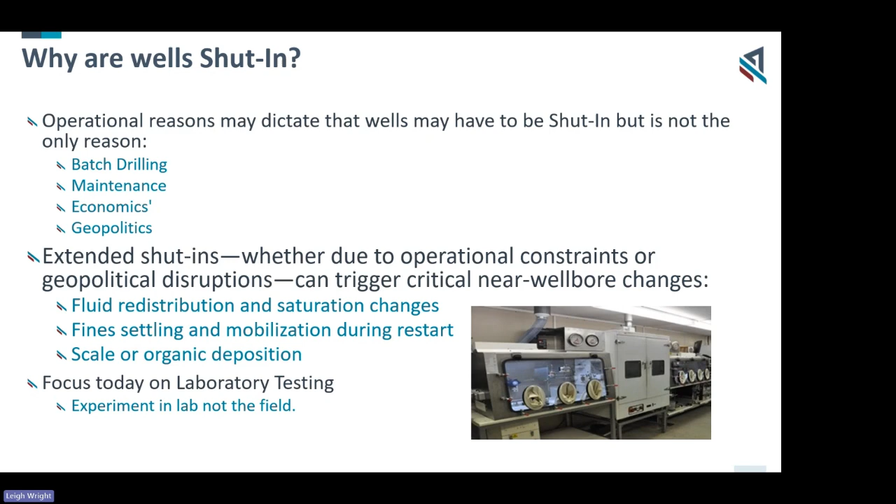So as mentioned at the start of this slide, today's focus is on laboratory testing from a formation damage point of view. I'm not an engineer, so I won't go into too much of the completion side on that. But creating understanding and pre-planning shut-in wells and restart strategies avoids unnecessary intervention costs.

So obviously, planning is key. If you are going to batch drill, for example, then understanding what will happen with the fluids interacting with the near wellbore is important. Understanding that if intervention is going to be needed in early life, you might want to acidize that.

What's important is that you understand what's going to happen when the well comes back on. You don't want to turn the tap back on after waiting 9 months, 12 months, 2 years, and then have to shut everything down and go in with a treatment to stimulate. Poor planning means you may have to spend more money in the future, which is not economic.

If behavior is not understood, then you might have mechanisms that are going undiagnosed, and the treatment could be wrong. For example, if the well comes back on and is not producing correctly as expected, you might think that's related to the mud, so you go in with a treating agent to dissolve the bridging agents or solids of the candidate drilling fluid, where actually it could be scale that's formed. You'd need a different treatment solution, and also that might not be fixable, so the production losses may become permanent. It's really important to make sure these are planned and understood.

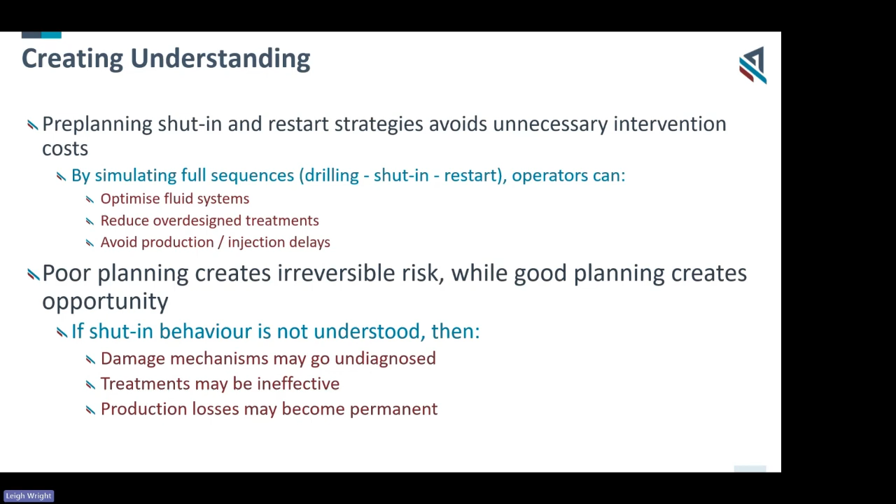When we're talking about geopolitical risks, this is maybe something you can't mitigate against. But whilst things are shut in, you can always carry on and check later on whilst the well's shut in, before you start mimicking what you've done before.

So what is important in terms of testing in the lab? The reservoir core material is available, prepared and selected correctly. What's key here is when you're doing different areas of shut-ins is that you have the correct core. That way you can understand the geology, making sure the right analysis is done at the start of the project or campaign.

XRD, for example, is key to understanding what fines are there, what quantity, are they swelling or mobile? Are they going to settle out?

The pressure and temperature is extremely important, mimicking that correctly in the lab. A few degrees temperature difference could have a massive effect on the chemical reactions. You might have polymers that don't break down at a certain temperature but break down at a higher temperature depending on the fluid type. If you choose a lower temperature than is representative, you might not get the correct chemical reactions in the shut-in test, which gives you a false narrative of what's actually going to happen. So as in all formation damage testing, you want to mimic as closely as possible the reservoir temperatures and pressures, because the chemistry is really important.

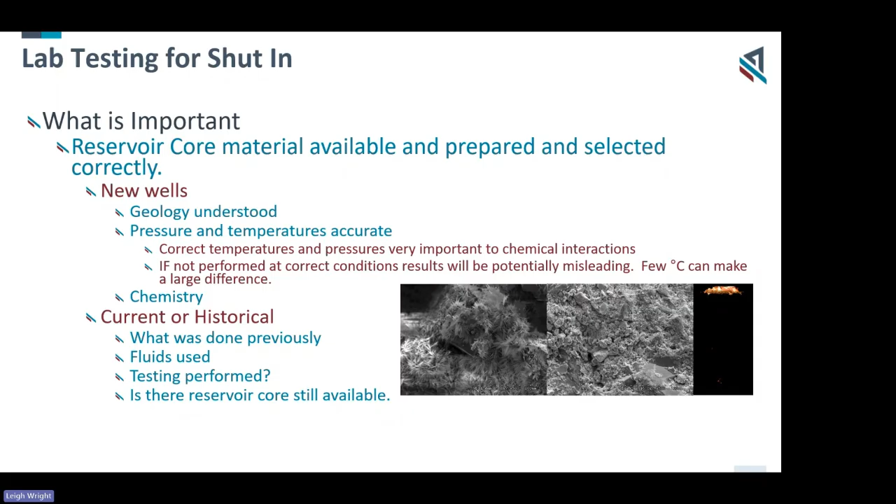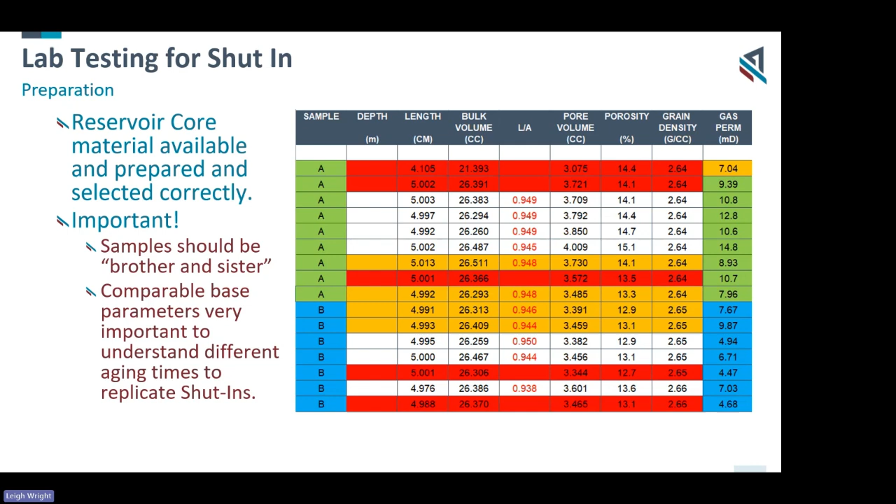So that's just a very proper housekeeping moment - to make sure that the samples are as comparable as possible.

Diagnostics is really important as well. As you may have heard in previous presentations, or if you've worked with us in the past, it's important to understand what has occurred to give the best solutions for any treatment if there are any issues. So what's causing the alteration? Why is things not coming back online the way they should?

Also, if the solids from the drilling fluid have gone deeper into the reservoir, have they settled? Have they been able to be back produced? And as we were mentioning earlier, what's happening with the compatibility of the fluids, has there been scale forming? So cryogenic SEM allows you to see everything that would be removed in solvent cleaning. For example, if there are any salt precipitates formed due to interactions or fluid incompatibility, with potential separation of the drilling fluids over time, if it's high temperature, long-term shut-in, the cryogenic SEM will have the power to allow you to understand the impact of that along with all these.

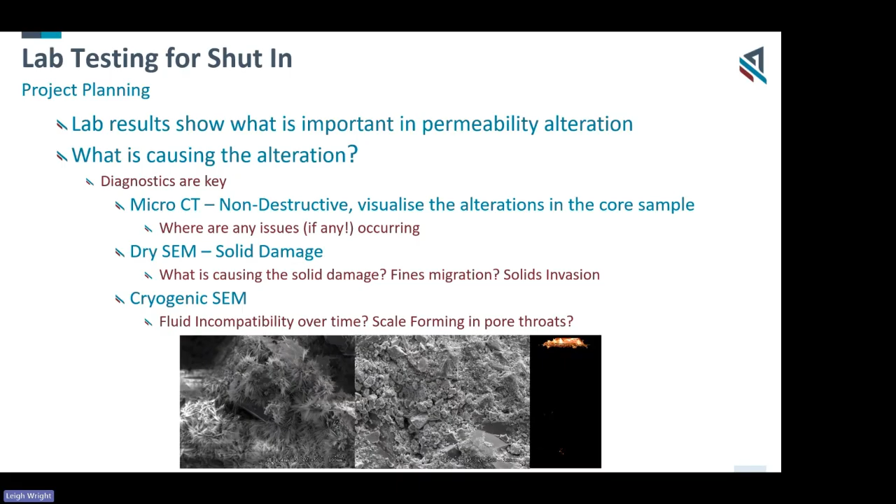As mentioned, onto the first case study from the North Sea. We're looking at a siliciclastic reservoir, new wells. As mentioned before, we have reservoir preserved samples, allowing multiple cores to be taken from each, and there are 2 lithologies, so 2 preserved samples.

So when we're doing that, we manage to take many samples from each of the preserved samples, and when we're running the base parameters, we manage to integrate with the client to make sure that the samples were brothers and sisters.

The case study will show that the drilling fluid was analysed first. So in the lab, they did a drilling mud application followed by a drawdown to see how the mud interacted with the core to give a base case.

That sequence then was built up to include a displacement fluid. So again, that's showing the mechanisms that are reducing permeability with this drilling fluid on its own, and then the drilling mud displacement. So once you've identified those mechanisms in the two base case core floods, you then can see the effect of the 3 months. So you're knocking out the variable of the drilling mud. You understand how that's interacting with the reservoir core. You're understanding how the drilling fluid and the displacement fluid are interacting together and interacting with the core.

So when we move on to the shut-in, the only variable we're looking at, comparing to those two tests, is the effect of the shut-in period time. So that was, in this case, 90 days or 3 months.

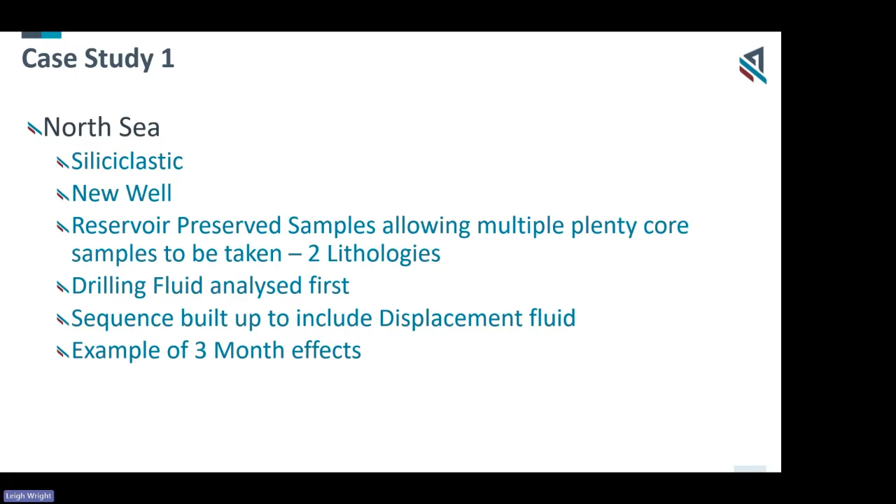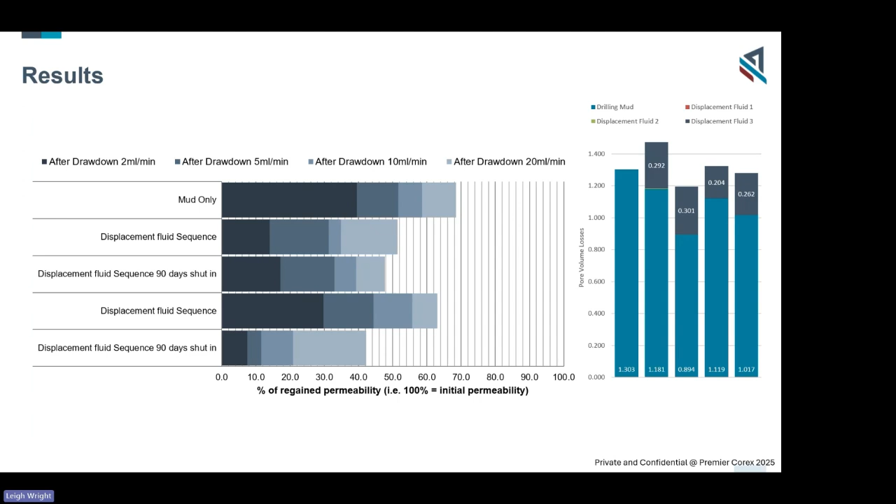That only regained about 45% after all three drawdowns. If you'd been looking at this from the point of view of turning the well back on, and had just been in the base case, you're looking at potentially 60, 65, 70% regained perm compared to 45%. So you're not getting that much. You're losing production from shutting it in for 90 days, just based on the drawdown data alone.

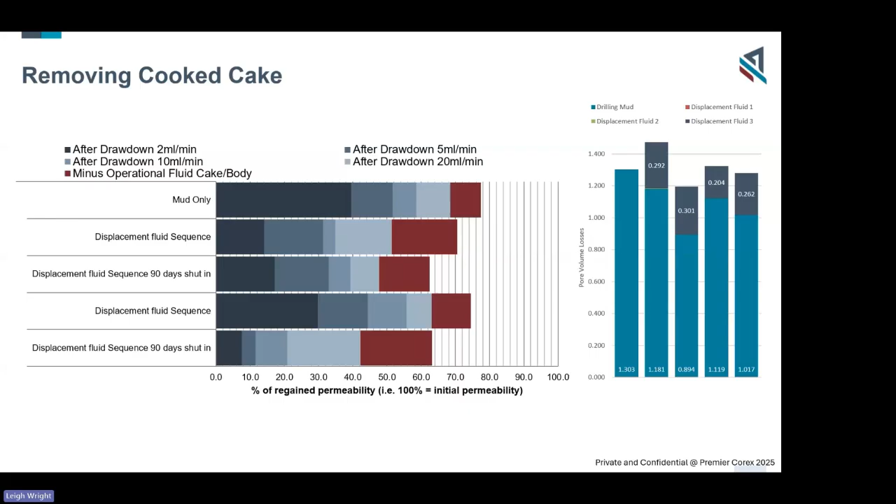The next step in the sequence was to offload the sample from the test cell and remove the operational fluid cake body. As you can see in the mud-only sample with no shut-in, that had about the same effect as a drawdown after about 20 mils a minute. But especially in the low perm sample that was shut in for 3 months, you can see that cake took it right back up into the 60-65% return perm zone. So in terms of lab data alone, that indicates the external cake got baked and was harder to shift.

I think this point is quite key for this part of the case study. For those unaware of what spin-down means, the samples are put into an ultracentrifuge and spun. You cannot spin down your reservoir interval, but this replicates long-term production. The good news in this case study was that when the samples were spun down, you're actually getting up to 80 plus return perm.

So what this indicates to the operator in this scenario is, although you may have initial poor production compared to what was expected, whether shutting in or not, after a long term of production you should start cleaning up that operational cake that's been baked a little bit onto the surface. The fluids stagnant in the pore throats start getting mobilized, meaning that after a long term in production, you get back to what production was expected.

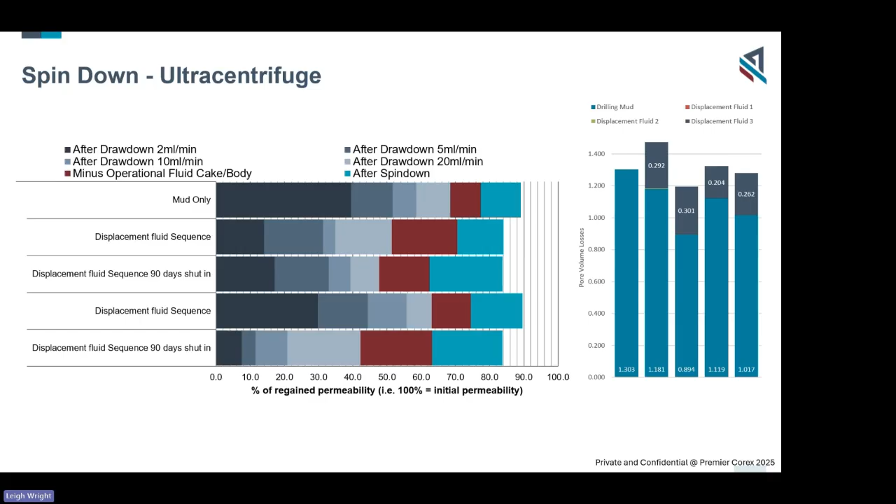So at the end of the day, this showed that yes, we're going to have an initial issue, but producing for the life of the field, it should get back to what it's expected to be.

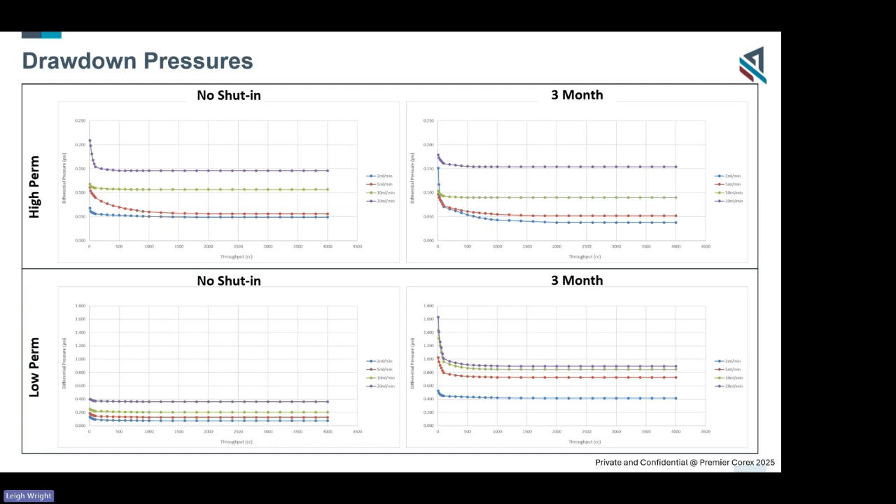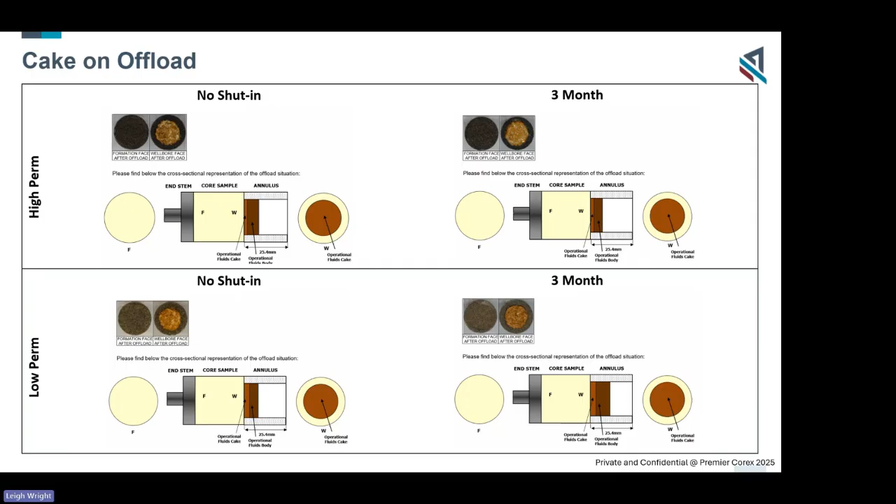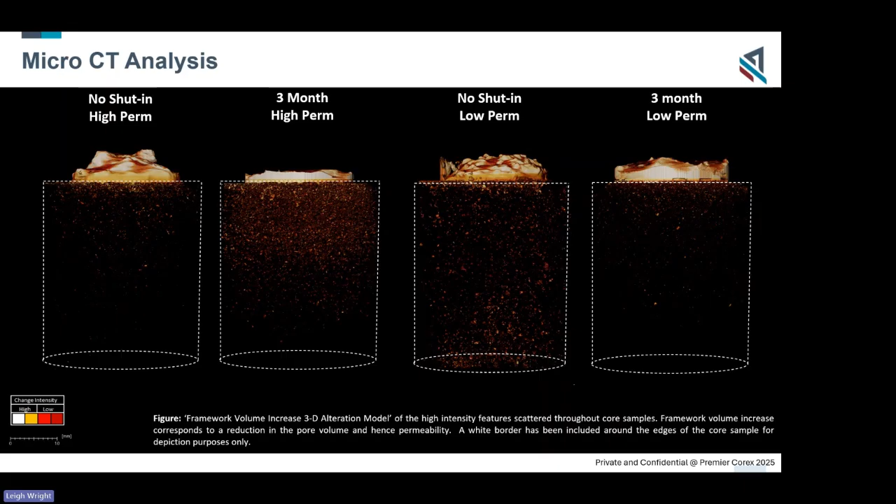You can see also a little bit of difference in the cake. On the low perm, you've got kind of the opposite occurring. There's a lot of infiltration with the low perm not being taken out with no shut-in, but then after 3 months, we actually don't have as much solid particulate in the core sample.

So what's important in the high perm samples was when we were looking at that, you can see, as I've said, that you've got a lot more particulate density change showing up in the 3-month. So we had a little look under the dry SEM imagery. You can see the wellbore face was pretty blocked. This is basically a standard drilling mud test.

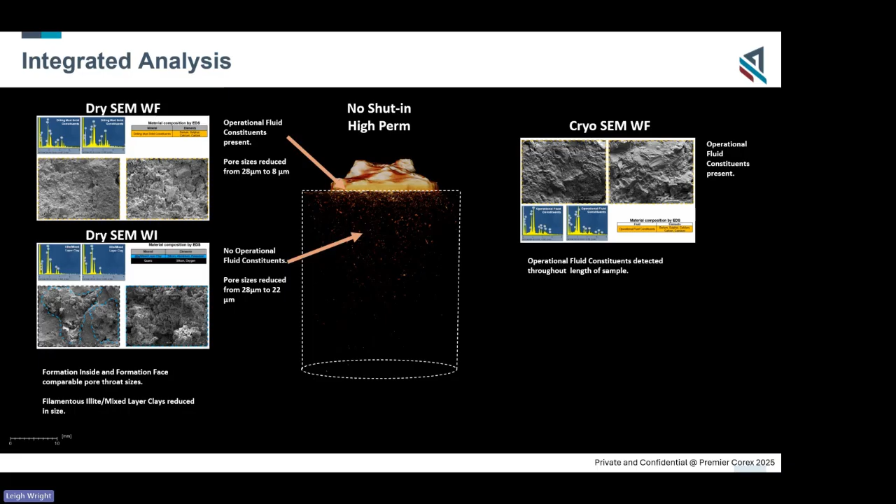The pore sizes were reduced from 28 to 8 microns. You can see on the right-hand side, the cryogenic SEM indicated that there was operational fluid filtrate retained in the core, probably with remnants of the drilling solids. You can see the pore throat sizes were reduced from 28 to 22, so you can understand why the permeability has been reduced.

That is causing the reduction in perm, and that is the major difference and takeaway you have. So for this case study, long-term production will get back to what's expected and match the no shut-in time after a period of time. But also there will be some mechanisms related to the mud getting cooked that, in this case, can be lived with because it does come back.

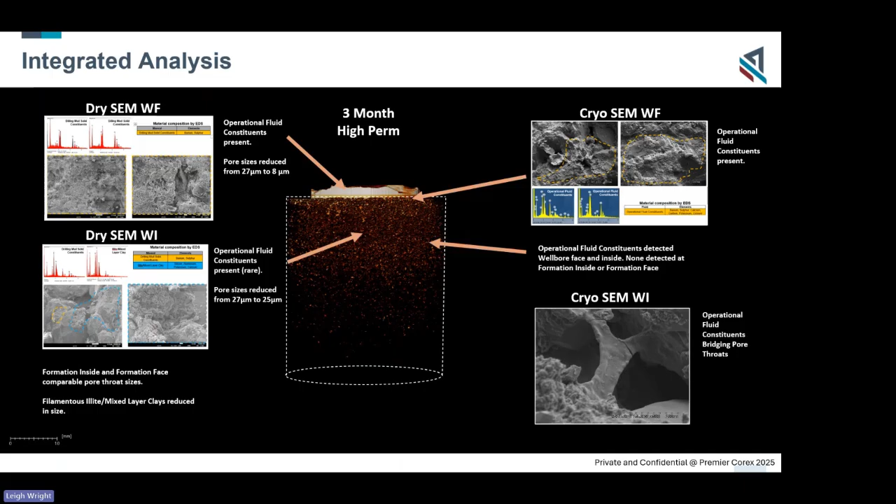So overall, for this example, this case study is quite successful because it gave the operator confidence in the drilling fluid systems, the fact that they could come back after shut-in, and also allowed them to understand that if they have any issues in the future due to the shut-in, these are the mechanisms that are occurring.

Moving on to the second case study. This was a batch drill example. We're slightly different here because we've moved straight on to the full sequence testing. In this example, there was a drilling fluid applied, followed by a completion fluid to allow the sanding hardware to be inserted.

So just again, if anyone's unaware of the test cells, we would have the ability to put the hardware into the system whilst doing the core flood. That gives an indication of how the hardware will perform. In this case, you can also do sand retention testing for the candidate sand screen to use, but the sand screen was selected prior to the study.

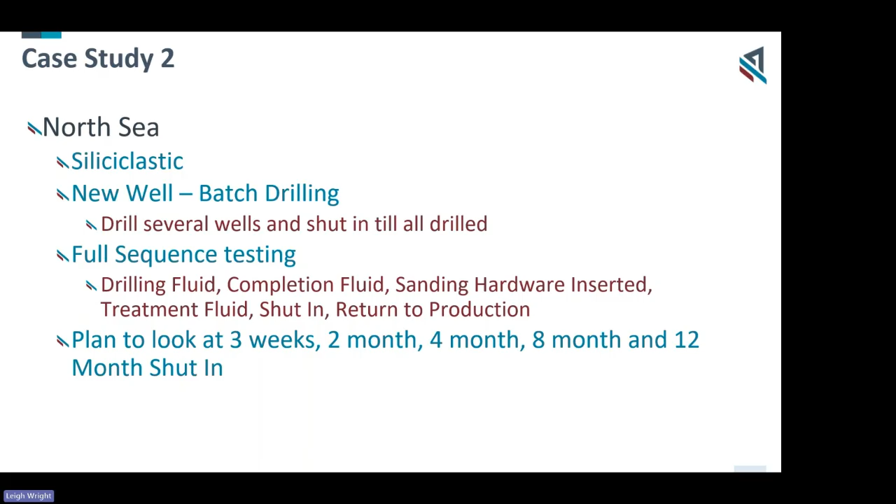Then a treatment fluid was applied. The wells were shut in, and then we went on to return to production drawdown as in the previous case. This one was going to look at 3 weeks, 2 months, 4 months, 8 months, and 12 month shut-ins.

This case study is really, really key. The key point of this one was understanding the geology of the core. The reservoir core was available, and we cut, cleaned, and performed XRD and SEM prior to testing.

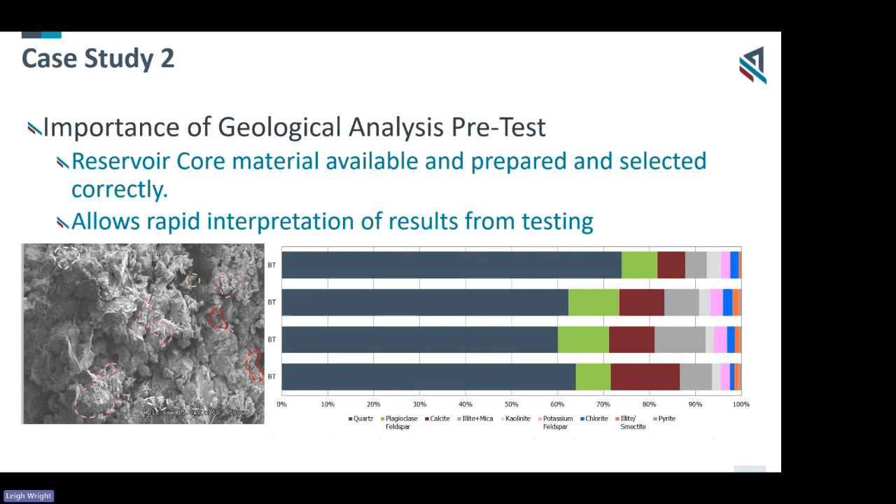So unfortunately, in terms of shut-ins, the shut-ins didn't actually occur. The samples all failed during the test sequences. We applied the drilling fluid, we applied the completion fluid, we inserted the hardware, we applied the treatment fluid as well, and then we shut in the samples at the pressure and temperature.

After 10 days, the first sample failed, and after 5 days another sample failed. There's a sample that failed at 9 days. So what had happened was that the samples popped in the cell, the cylinder deformed, and the test failed.

So you're saying, why are you showing this? It's because it is an extremely good result. It actually allows you to understand that this sequence is not going to be compatible.

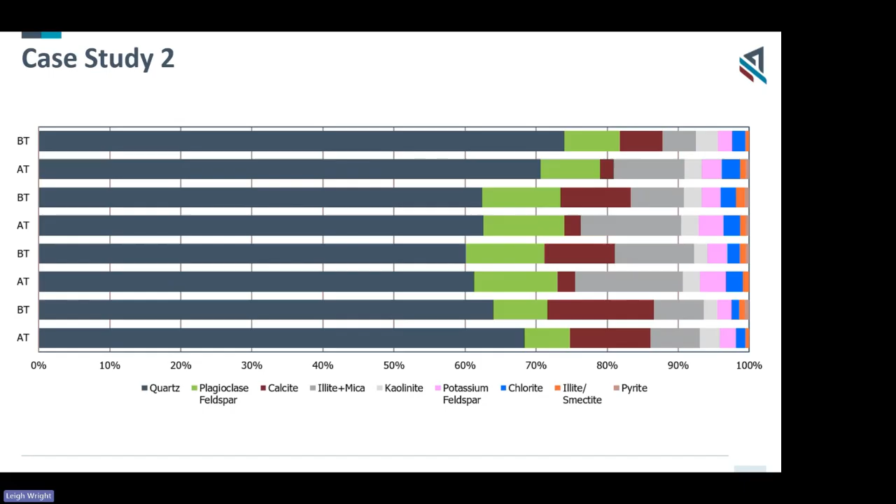So the calcite has gone missing from the near-wellbore. What had happened was that the treatment fluid, the candidate for this batch drilling, was far too aggressive, and attacked not just the drilling fluid constituents, but it actually attacked the matrix of the reservoir as well.

And when that gets dissolved, you're losing integrity, and unfortunately that is what happened. But again, I say quite fortunately, because that knowledge of that treatment fluid being aggressive and attacking the matrix is now known, and other options could be looked at.

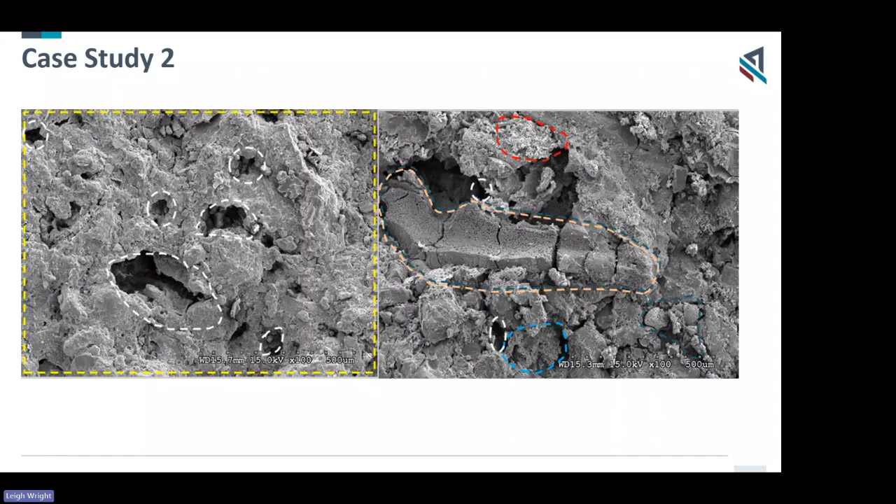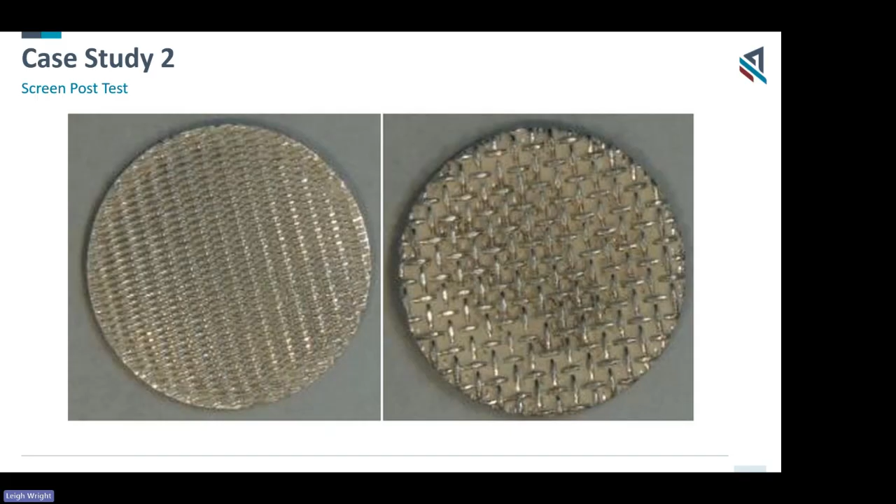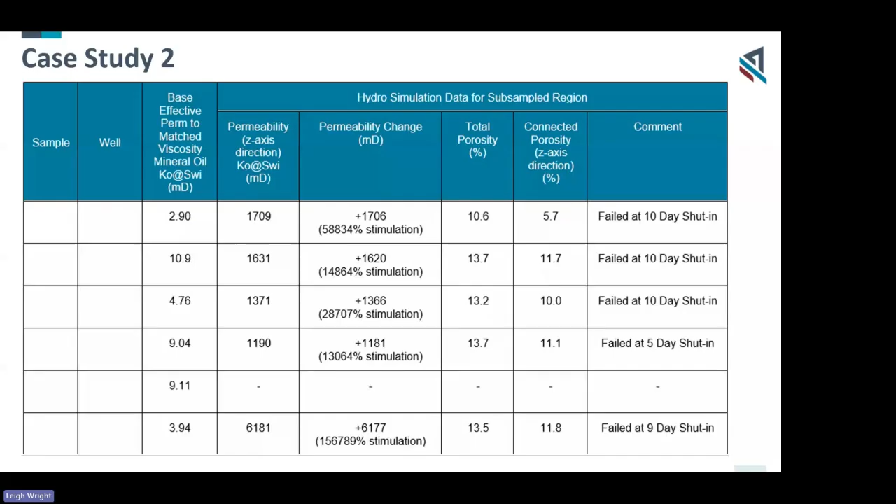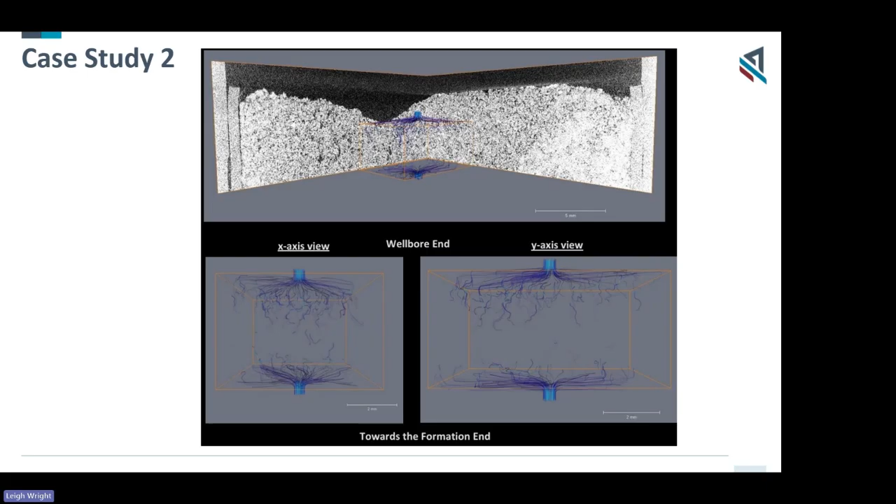So in the results here, we calculated the percentage stimulation, and the numbers are huge. So the core was stimulated, the cement was gone, but at the same time you had near-wellbore collapse.

Again, what I really wanted to point out is that this may seem a bad result, that you don't have the end product of seeing what's going to happen at 3, 6, 8, 12 months, but you do see initially that the chemical may not be what was expected. That then allows the vendor to take that information and maybe tone down the reactive components of the treatment.

So everyone wins in that understanding. If they hadn't done the laboratory testing for that acid and just turned on the taps, then I think in that case there's probably quite a lot of reservoir being produced.

So the conclusions of the case studies are that diagnostics and lab data are key to understanding what will occur whilst a well is shut in, whether it's a new well or coming back online, understanding how the treatment will work. It's key to experiment in the lab and not the field.

The shut-in tests for case 1 - as I mentioned, the initial effect on the shut-in period had an initial effect on production, but long term the values will come back as per the lab data. Using the diagnostics, it was clear that there were some differences in how the core and the fluids had interacted, so that can be taken and noted for any future issues.

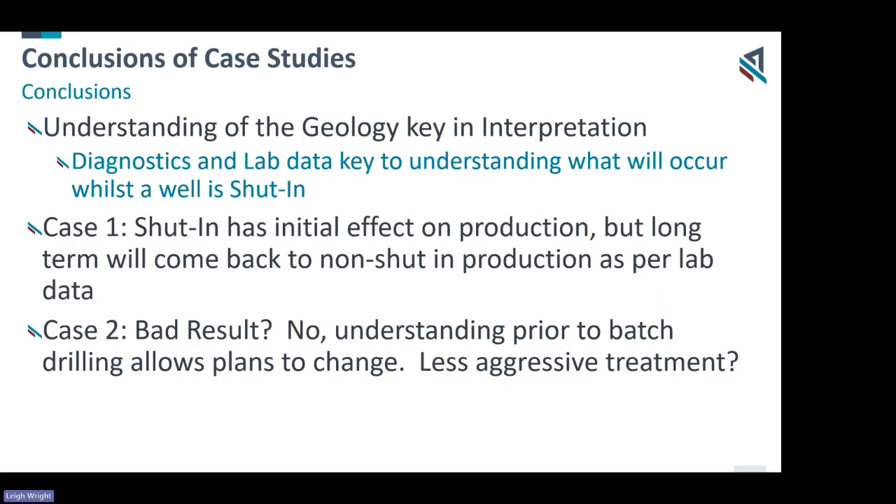Case 2 - a bad result? Don't think so. It actually allowed greater understanding. The mud cake was definitely cleaned up, so that was good, but at the same time you understood that the matrix was collapsing, which means a less aggressive treatment was probably the best case for that.

In conclusion, for these case studies of formation damage shut-ins, the 2 I've decided on today for the North Sea - experimenting in the well, the outcome is unknown. If you get production coming on, great, that's really, really good and excellent news. But if it doesn't come back onto production, you don't understand the mechanisms of why that's occurring, and you could go in with the wrong treatment.

The understanding is key. For emergency shut-ins, replicate the original drilling sequence. Experiment with different treatments in the lab, so you don't have to spend money trying different chemicals. If one chemical doesn't work and you have to go in with another one, you're spending a lot of money on man hours, different fluids, lost production.

Shut-ins are not idle periods. Nothing stops. Chemistry continues. No matter what, the processes are ongoing. Fluids could separate out, like we mentioned before, fines could settle out, scaling might occur. So shutting in and just leaving and then thinking production is going to come back is not a viable option.

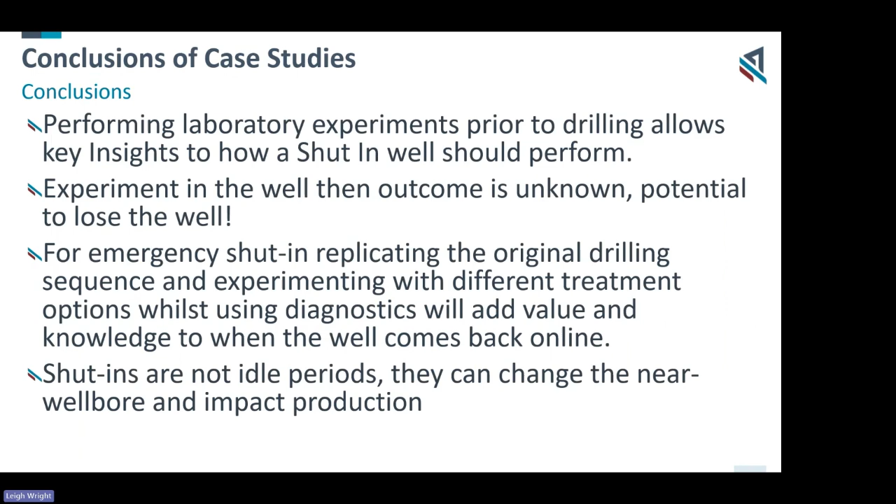In our opinion, testing these things out in the lab makes a lot of sense. And on that note, that is the examples for today, and thank you very much for attending.